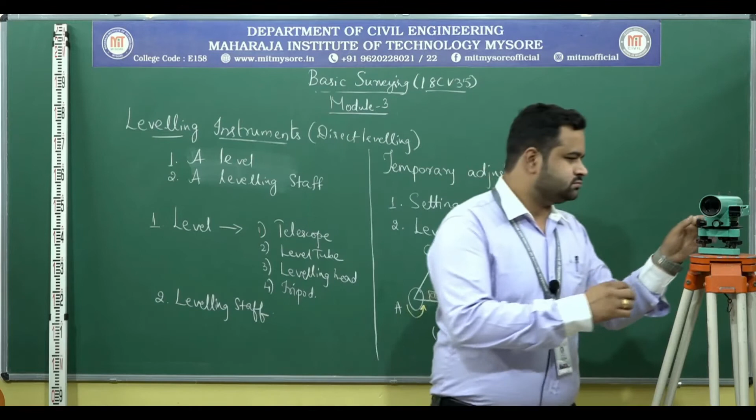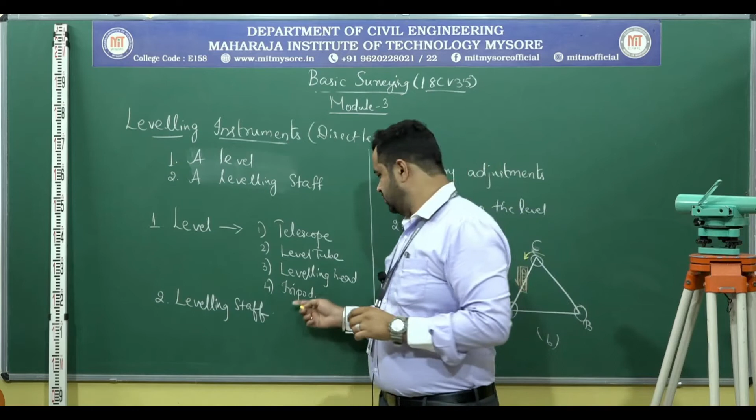A level should consist of a telescope, a level tube, a leveling head, and a tripod. If you see here, there is a telescope - this is the telescope. The second is the level tube, here. Next is the leveling head - if you see these black screws, these are the leveling head. And next, tripod - the instrument is resting on a tripod, this is called the tripod. So a level consists of telescope, level tube, leveling head, tripod, and also leveling staff.

Whatever objects which you bisect should be bisected to the staff, kept at different points. I had explained what a dumpy level is.

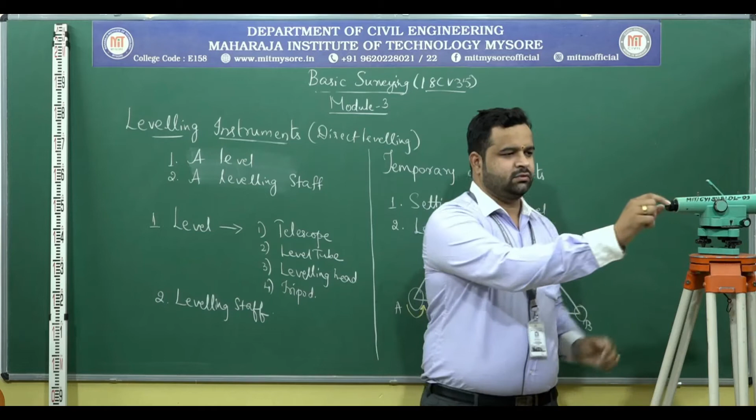If you observe here, the parts of the dumpy level are as follows: this is called the eyepiece, this is the focusing screw, this is the objective end, this is the focusing screw, and this is your bubble, which has to be leveled before taking readings. There is one more water bubble here used to level the instrument. So this is what a dumpy level consists of.

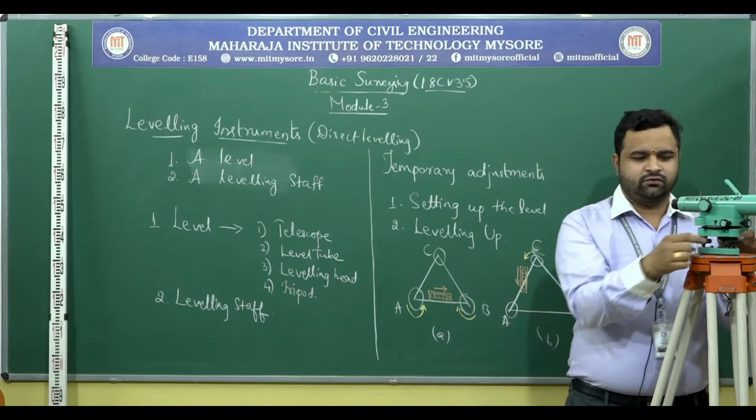If you observe here, there are screws - these screws are called foot screws. There are 3 foot screws, and as I told you in the last class, the dumpy level will be having a tribrach plate. If you observe, there is a plate here in triangular form - this plate is called the tribrach plate, and this is the tripod. The dumpy level should always be fixed to the tripod; without the tripod you cannot use this instrument.

Now coming to the leveling staff. What is a leveling staff? It is a straight rectangular rod, as you can see here, having graduations. The foot of the staff represents zero reading.

The purpose of a level is to establish a horizontal line of sight, and the purpose of the leveling staff is to determine the amount by which the station is above or below the line of sight. So when you observe through the telescope, this leveling staff helps us judge whether the object is below or above the line of sight.

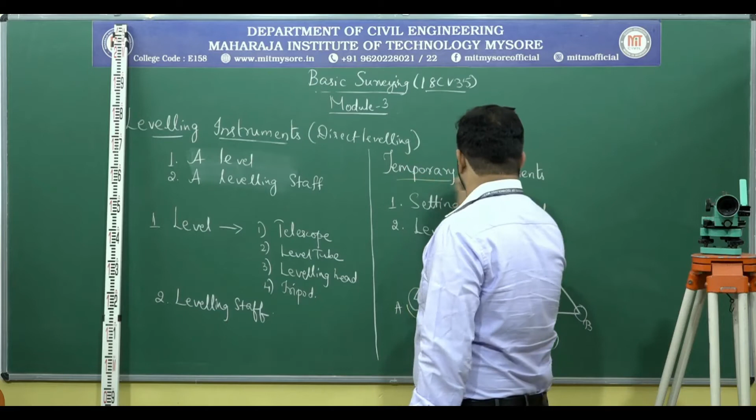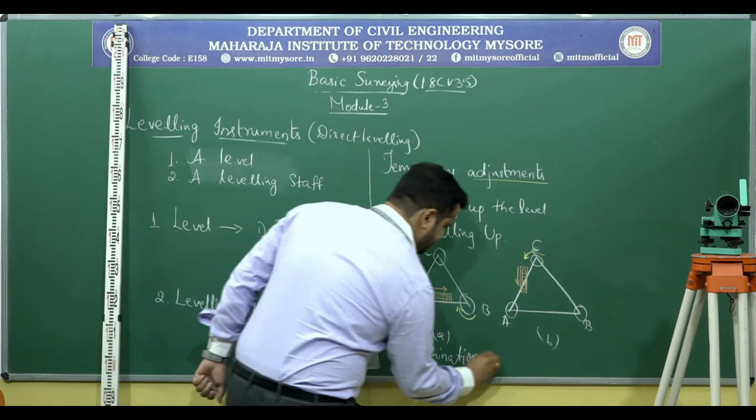Next, let us understand what are the temporary adjustments made in a dumpy level. The first step is setting up the level, the second step is leveling up, and the third step is elimination of parallax.

So how do you set up the instrument? How do you set the level? In this step you have to fix this instrument to a tripod, and then by using the tripod legs you have to move them radially to do the approximate leveling. You should move the legs circumferentially or sideways without disturbing the plumb line.

So you know what a plumb line is. You can fix a plumb bob here to transfer the center of the instrument to the ground - we should make use of a plumb bob, and this defines the plumb line.

So when you move the legs radially, the plumb line may move, but when you move the legs sideways, the plumb line should not move. Okay, here there is a tube. This is used for approximate leveling, that should be done with the help of the tripod.

Next is accurate leveling. The first step is you should level the instrument approximately, fix the instrument to the tripod. This is setting up the level.

Coming to the second step, leveling up. After we have set the instrument approximately, now we have to set it accurately. To level this instrument accurately, we should make use of foot screws. There are 3 foot screws like this.

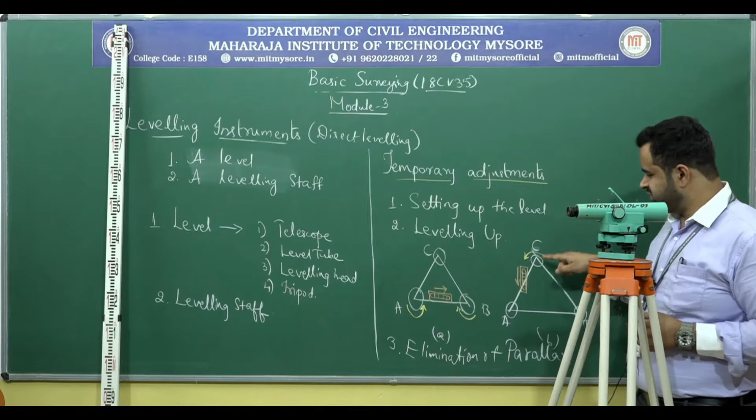Then you have to rotate this by 90 degrees so that it is now perpendicular to AB. Previously this bubble tube was parallel to AB. Now it should be perpendicular to AB, and then at C you have to turn the screw as shown in this figure. After setting up, once the bubble is central...

Now you should turn the telescope by 180 degrees and check whether the bubble is still central. If it is central, then only we should proceed to the next step, that is taking the readings. Otherwise, the readings taken will be wrong.

Coming to the last step, last temporary adjustment, that is elimination of parallax. Parallax is a condition that arises when you are not able to bisect the crosshair. So you will be having a crosshair here, and that will not be visible at the initial stage.

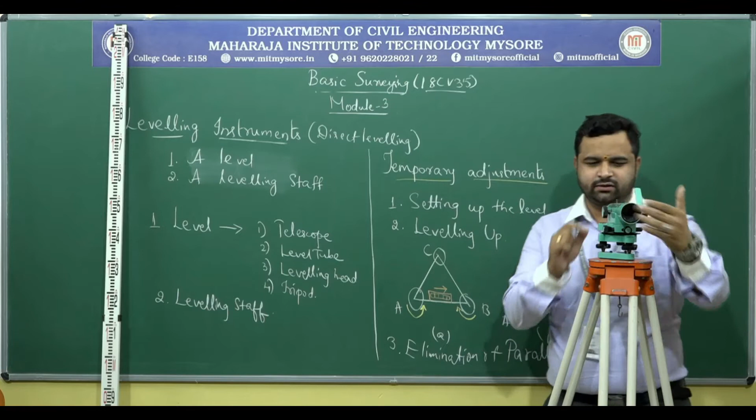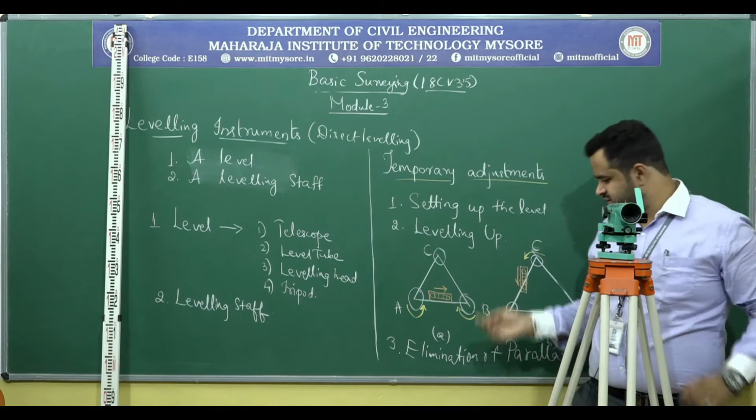For that, you have to direct this telescope towards the sun, or keep a white sheet in front of the objective end, and then make your crosshair appear until it is sharp and distinct. Once the crosshair is visible, the second step in eliminating parallax is you have to bisect the object, using the focusing screw.

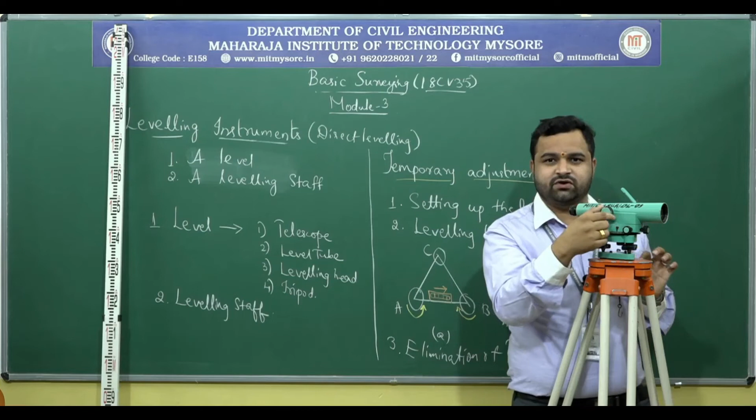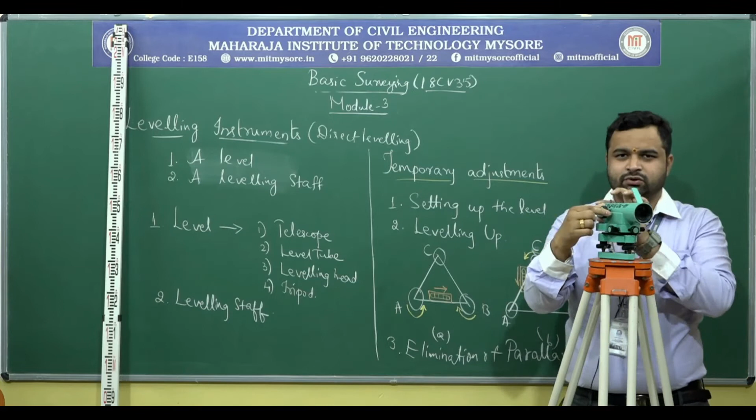So how do you eliminate parallax? By focusing the telescope towards the sunlight, or using a white sheet, and then making use of this screw. You have to rotate until you get a sharp, clear and distinct crosshair. Then, using the focusing screw, you can bisect the object until it appears clear and sharp.

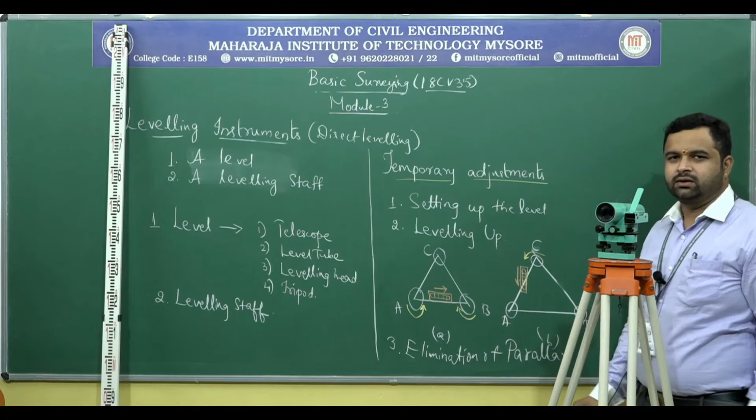So these are the temporary adjustments done in a dumpy level. Now if you take the staff readings from the dumpy level, the line of sight is always horizontal. Next topic, that is curvature and refraction corrections.

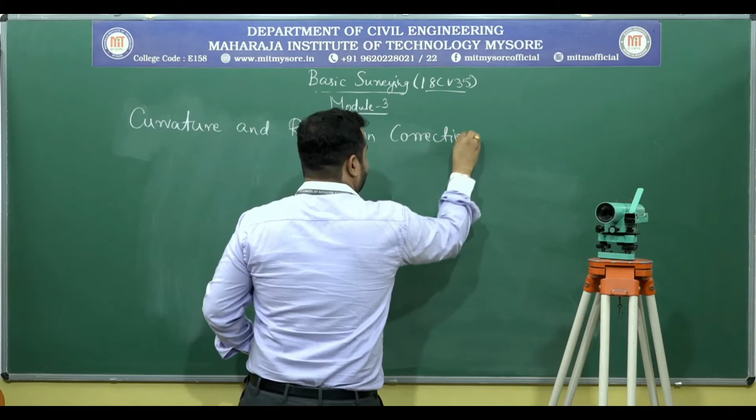As you can see, I have drawn figures. So this is the level line, and this is the ground profile. There is an instrument setup. Then from the telescope, if I bisect an object, this will be the line of sight, whereas this will be the horizontal line.

This is point B. This is a staff kept vertically. Actually, if you see from the telescope, you should bisect at point B. Strictly speaking, the staff reading should have been at B, but since the line of sight is horizontal in the dumpy level, we tend to take the reading at point C.

So if the staff reading is taken, actually it should have been at B, but the staff reading which you are going to obtain is at C. Next, if you consider this triangle OAC, we can say that this angle is 90 degrees, perpendicular.

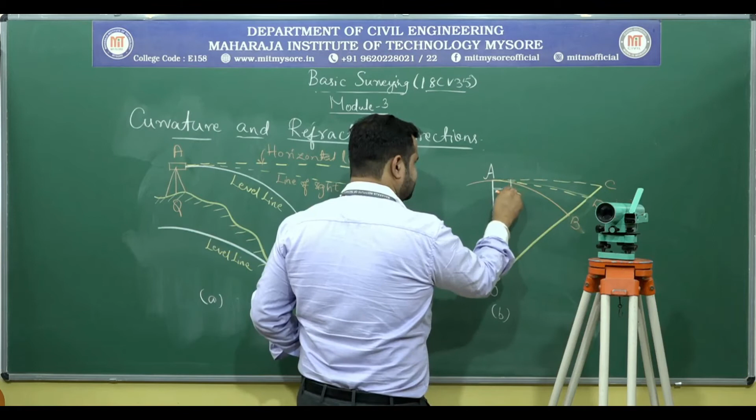Let us understand what is curvature. BC is the departure of the level line. Let us take this BC as the departure of the level line.

Actually, the staff reading should have been taken at B, where the level line cuts the staff. But since the level provides a horizontal line of sight, the staff reading is taken at C. Thus, the apparent staff reading is more.

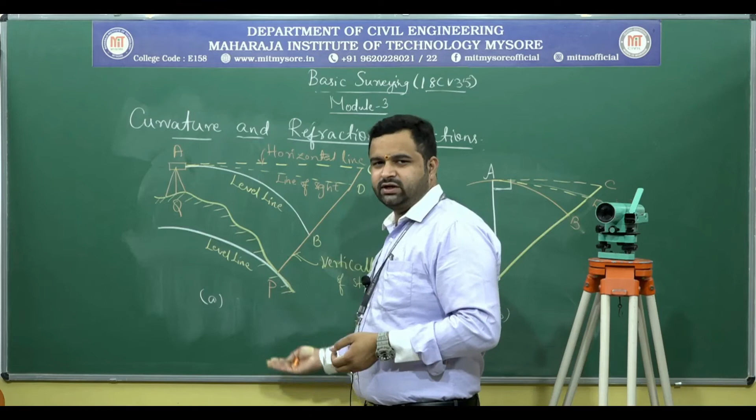Therefore the object appears to be lower than it really is. So the correction to be applied for curvature is always negative, that is, the object tends to be lower than actually it is. So what about the correction formula for curvature?

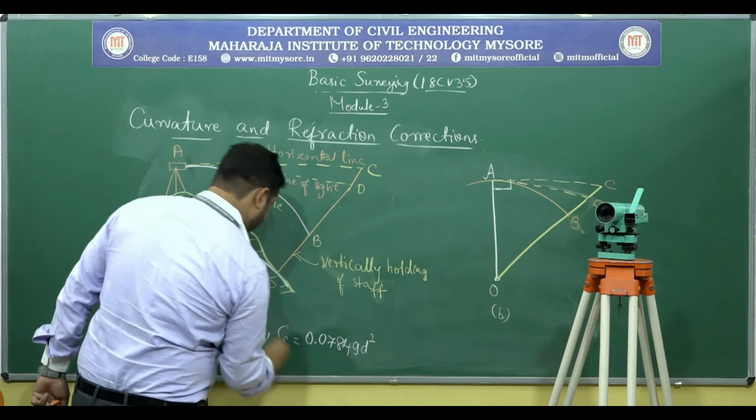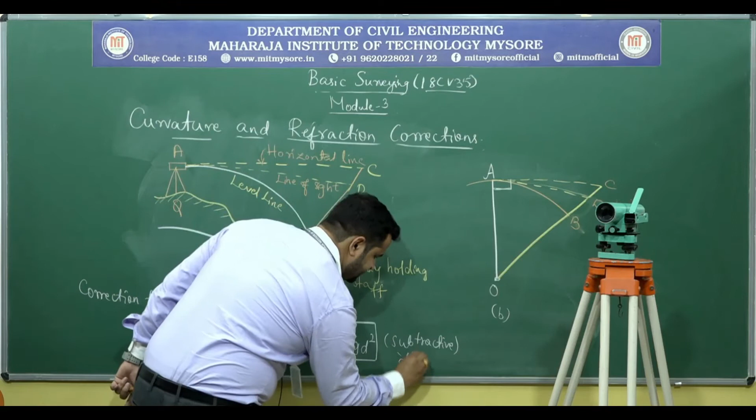The correction formula to be applied for curvature is 0.07849 d square, where d is in kilometers. So when we try to solve numerical problems on it, please substitute d in kilometers only.

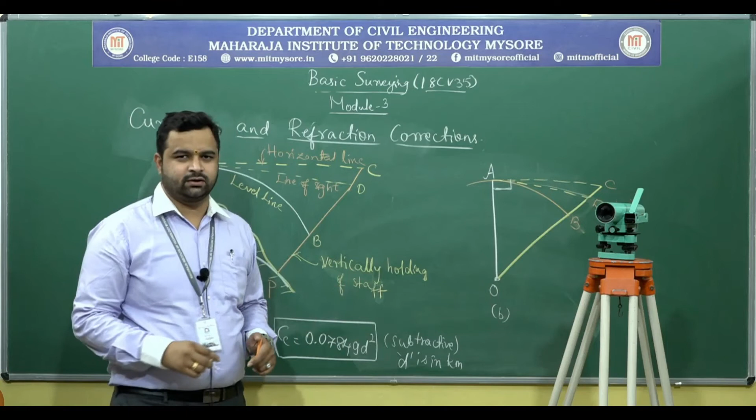Next, what about refraction? The effect of refraction is same as if the line of sight was curved downwards or concave towards the earth's surface, and hence the rod reading is decreased. Therefore, the effect of refraction is to make the objects appear higher than they really are.

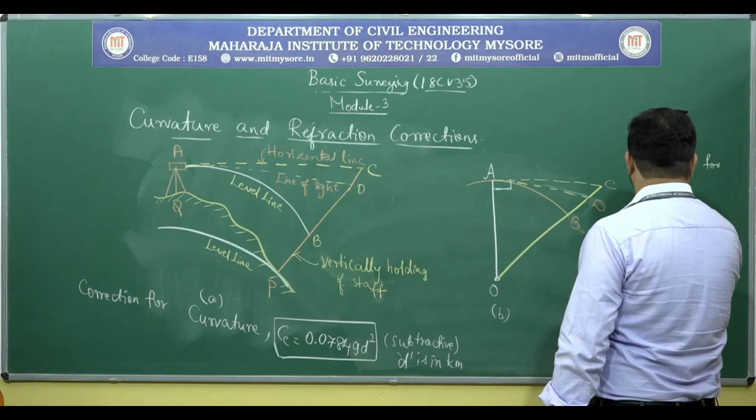The correction as applied to staff readings is positive in this case, whereas in the case of curvature it is negative. Here for refraction it is positive. That is, correction for refraction, CR, is equal to 0.01121 d square, again where d is in kilometers.

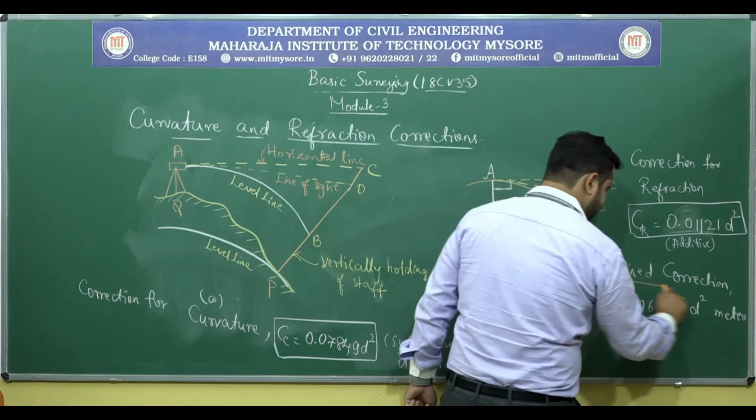Now the combined correction for curvature and refraction is given as 0.06728 d square in meters. This is the combined correction for both curvature and refraction. Please note the unit is in meters, but you have to substitute the value of d in kilometers. Please don't get confused here.

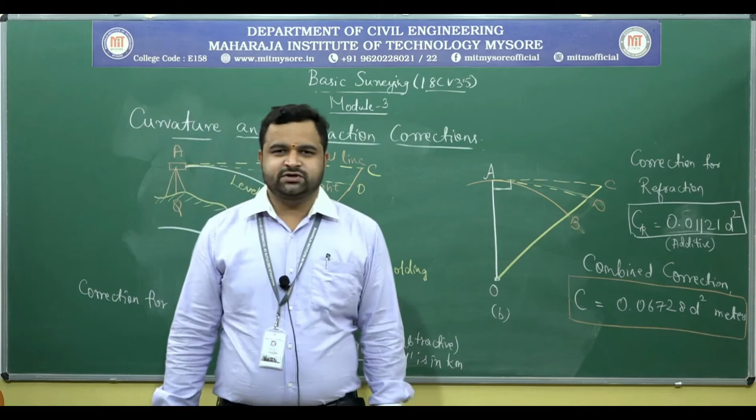Next we shall move on to the numericals on curvature and refraction.

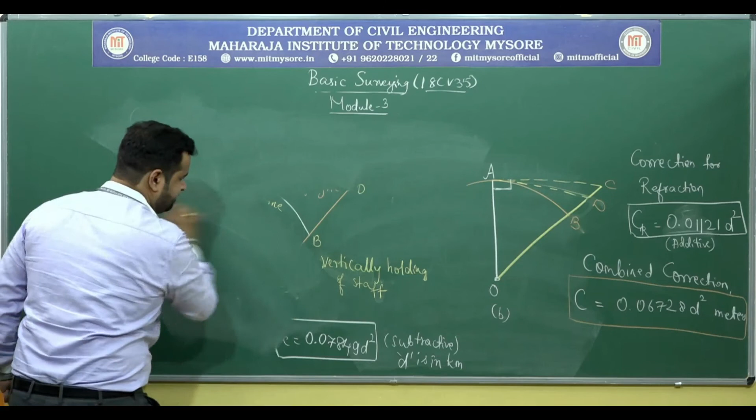Correction for curvature is equal to 0.07849 d square meters, where d is in kilometers. Correction for refraction is equal to 0.01121 d square in meters, or also this correction for refraction is given by CR equal to 1/7 Cc. Make use of this relation to calculate the correction for refraction.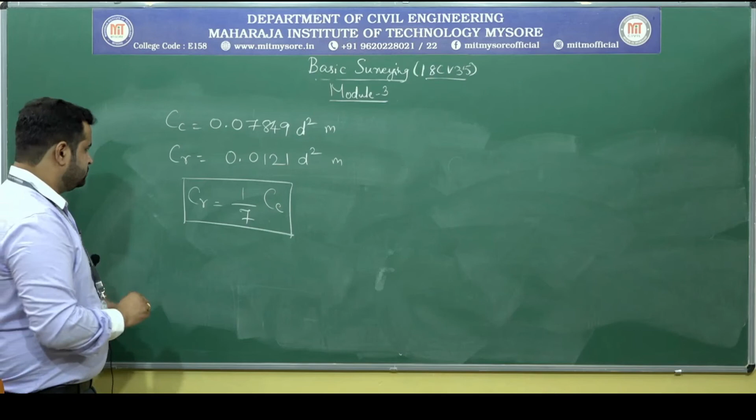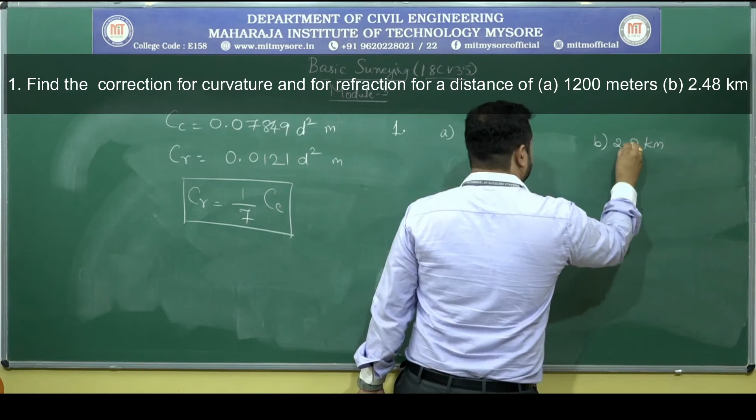So by making use of these formulas, let us solve some numericals. First one: find the correction for curvature and refraction for a distance of A, 1200 meters, B, 2.48 kilometers. We have to calculate correction for curvature and correction for refraction for the given distances.

So we have to calculate correction for curvature and correction for refraction. Taking the first one, d is equal to 1200 meters. If I write it in kilometers, I will write 1.2 kilometers. So correction for curvature is equal to, make use of this formula, that is 0.07849 d square meters. It is equal to 0.07849 into 1.2 square, that is equal to 0.113 meters. Okay, this is correction for curvature.

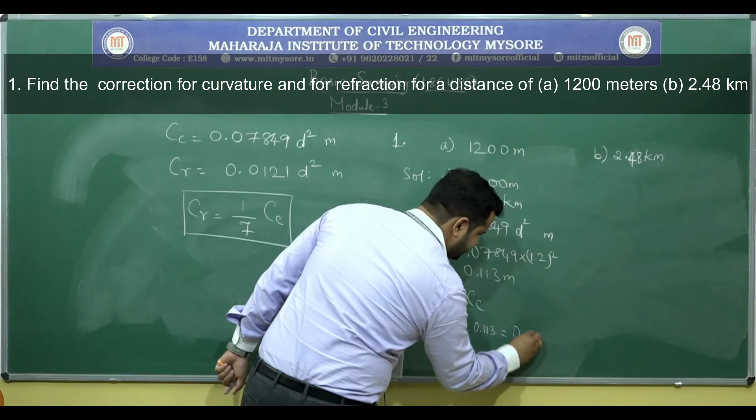Now correction for refraction, Cr is equal to 1/7 into Cc, that is equal to 1/7 into 0.113, is equal to 0.016 meters. So this is correction for refraction for the distance of 1200 meters.

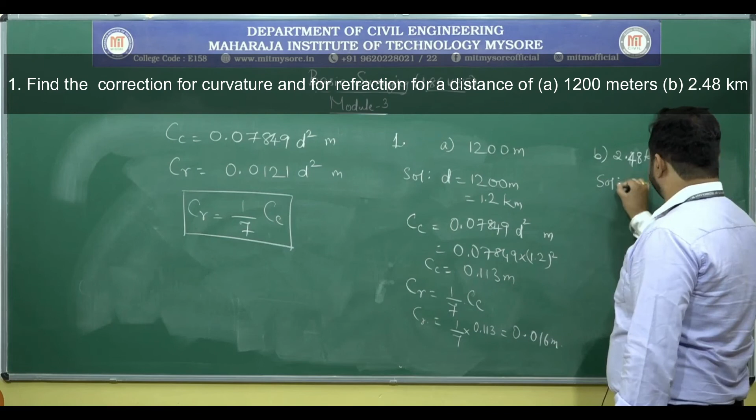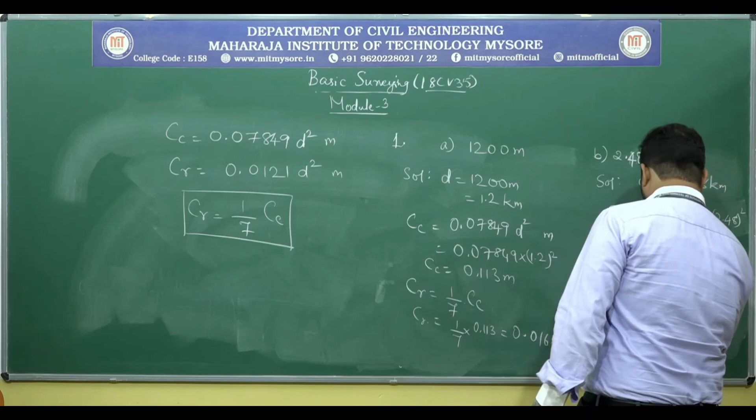Now for a distance of 2.48 kilometers, Cc is equal to 0.07849 into 2.48 square, that is equal to 0.483 meters, whereas correction for refraction is equal to 0.069 meters. Okay, this is how you calculate the correction for curvature and refraction.

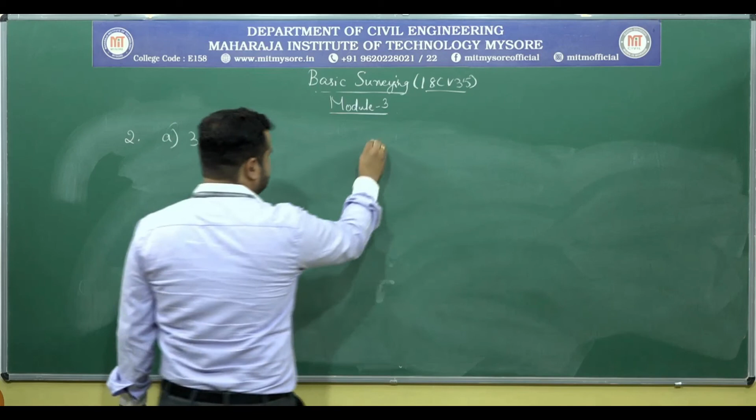Second problem: find the combined correction for curvature and refraction for first distance of 3400 meters and the second distance of 1.29 kilometers.

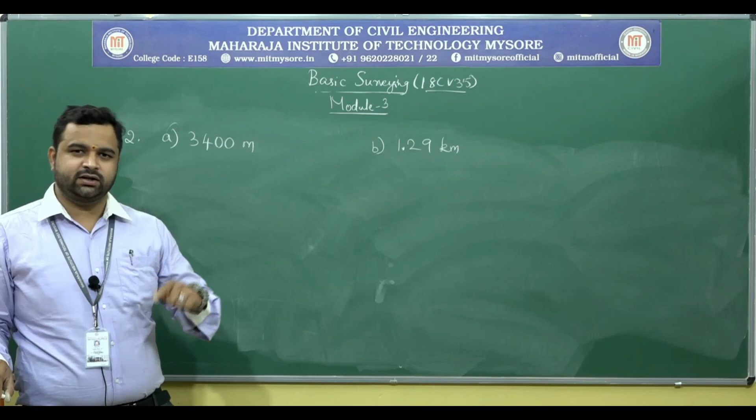In the previous problem, you had calculated the correction for curvature and the correction for refraction separately, but here you have to calculate the combined correction. So what is the formula? C is equal to 0.06728 d square in meters, where d is to be substituted in kilometers. Here d is equal to 3400 meters, that is equal to 3.4 kilometers.

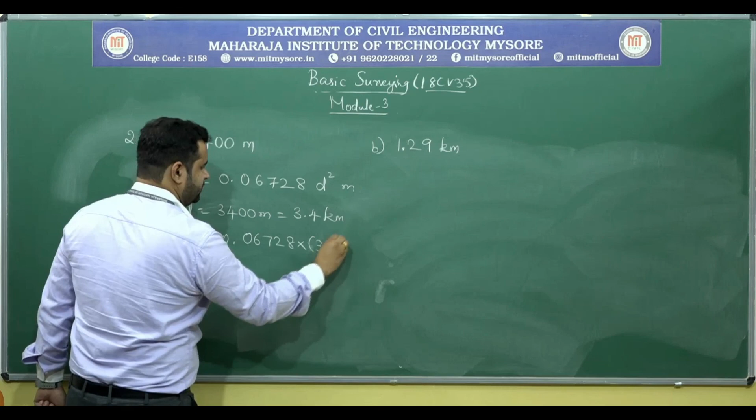Therefore correction is equal to 0.06728 into 3.4 square, that is equal to 0.778 meters. Next, similarly for 1.29 kilometers, C is equal to...

0.06728 d square meters, that is equal to 0.06728 into 1.29 square, that is equal to 0.112 meters. This is the combined correction for curvature and refraction. This is how you calculate the combined correction for curvature and refraction.